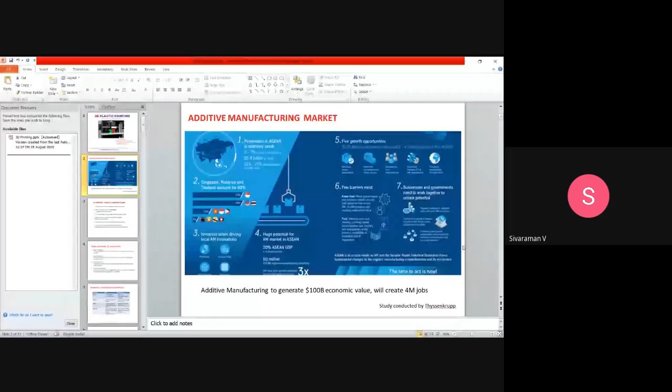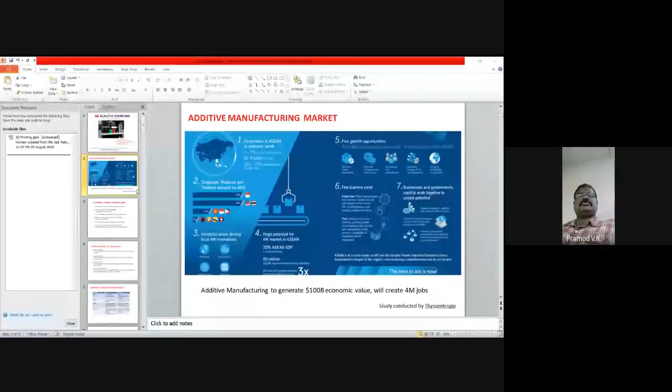Sorry for the break. It happened due to poor internet facility.

Let me once again quickly go through what I explained in the last few slides. This slide shows a report given by Thyssenkrupp Group for ASEAN countries, and it is predicted that additive manufacturing is going to generate 100 billion in economic value and will create 4 million jobs.

Additive manufacturing has the potential to create 3 to 4 million jobs by 2030 and will reduce overall imports. In this ASEAN group, India is not included. Of course, India is not included by the Thyssenkrupp Group, but the same report is valid for India also.

By 2025 to 2030, around the same growth, 50% growth will happen as seen in the ASEAN market. Additive Manufacturing Hub in India will focus on innovations around additive manufacturing solutions in metal and plastic technologies for customers in marine and offshore, automotive, cement industries, chemical, mining, and other heavy industries.

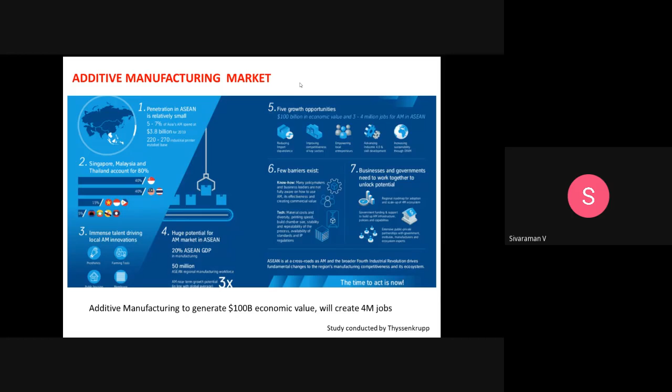As I explained earlier, I will quickly go through what is 3D printing. There is still confusion between 3D printing and additive manufacturing. If you Google it, it will say both are the same, but there is a distinct difference between 3D printing and additive manufacturing.

Basically, 3D printing is a process of building an object layer by layer. The layer thickness can be controlled digitally by means of a 3D model. Since it is fundamentally additive rather than subtractive, the other name for it is additive manufacturing. ASTM F42 defines 7 different additive manufacturing processes. I will tell you what those 7 manufacturing processes are.

This additive manufacturing is just an industrial version of 3D printing. In a nutshell, if I want to differentiate between 3D printing and additive manufacturing: 3D printing is a term for the shop and factory floor, whereas additive manufacturing is for an enterprise and supply chain.

Now I will tell you about ASTM F42. As per that standard, there are 7 different additive manufacturing processes. What are those 7 processes? One is vat photopolymerization, number 2 is material jetting, number 3 is binder jetting, number 4 is material extrusion. In material extrusion, fused deposition modeling and fused filament fabrication are 2 techniques to extrude the materials. Number 5 is powder bed fusion, 6 is sheet lamination, and 7 is directed energy deposition.

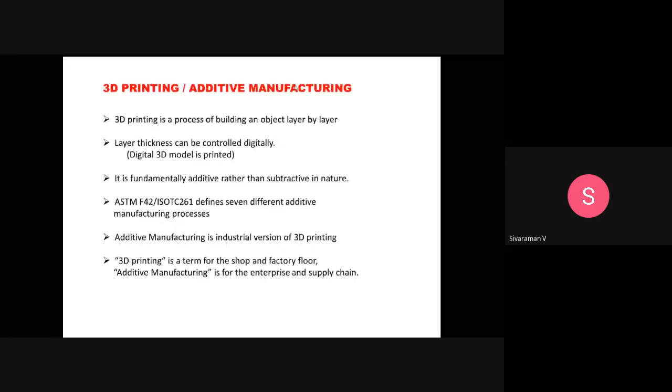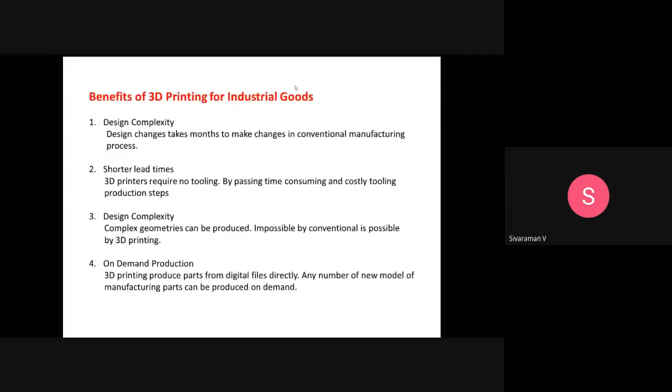If you compare 3D printing versus traditional manufacturing, 4 factors you need to consider: cost, design, speed, and quality.

For 3D printing, in terms of cost, you can save 70%, whereas it is higher for traditional manufacturing, and shipping also has to be taken into account. If you consider the design aspect, it is less expensive for 3D printing, whereas it is more expensive for traditional. If you consider the speed of manufacturing, it is more for traditional and less for 3D. There is a need to compress the design cycle.

In terms of quality, there are still problems that come out of quality, but with the latest printers available in the market, we are getting high precision products compared to the traditional one, which gets high precision manufacturing as well.

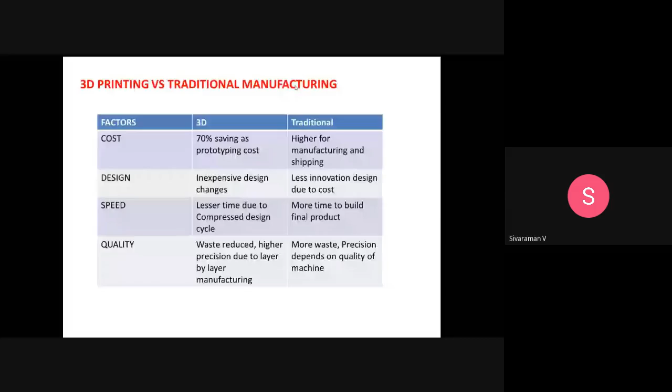Here you are seeing additive manufacturing for end-use products. In terms of percentage, they divided the common elements or functional parts, fit and assembly, patterns for prototype tooling, patterns for metal casting, visual aids, presentation models, educational research, tooling components, and others. This is the report given by Wohlers in 2014, and it is still valid with plus or minus 10% variation. This 3D printing or additive manufacturing is mostly used for functional parts, almost 30 to 40%.

As I said earlier, slowly but surely 3D printing has been transitioning from a method of producing visual aids and prototypes to a technology capable of manufacturing end-use parts. While 3D printing is still viewed by someone as being used primarily to produce models and trinkets, the reality is that additive manufacturing is now being used for functional parts in a variety of industries, as you've seen in this slide.

The widespread adoption of 3D printing is most visible in the aerospace and automotive sectors, with an 8 to 10% contribution. These were some of the first industries to adopt 3D printing for end-use parts, and they have the most accumulated experience. The ability for additive technologies to produce single lightweight pieces with complex internal geometries is particularly valuable for these industries.

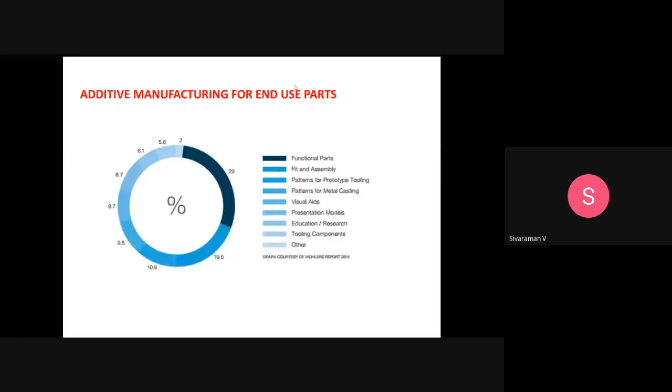This is the ASTM F42 standard, which deals with 5 main important processes. One is AM process and equipment standards, application-specific standards for aerospace, automation, automotive, and medical, and feedstock material standards covering what type of material powders and polymer filaments you can use, and finished AM part standards covering post-processing techniques, NDT, etc.

There are also general standards covering AM terminology, testing methods, and safety, including what safety precautions we need to take. Please go through these standards very carefully.

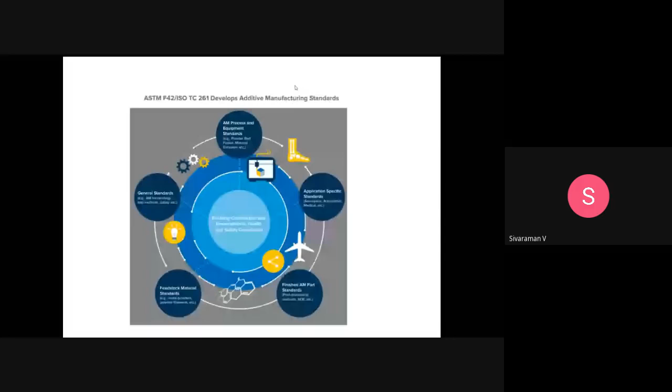For beginners, I would like to fundamentally explain what is subtractive machining and what is additive manufacturing. In subtractive manufacturing, what you see on the left hand top side is a block, which is milled by a milling machine or drilled by a drill tool. What is happening is material is removed from a block.

In the next figure, you can see chips coming out when the machining is happening. That is the reason it is called material removing process or material removing machining, otherwise called subtracted or removed, to make the component or product.

In a classic example, you can see at the bottom side an impeller manufactured through forging process. Like I said earlier, a block is forged into a model which is seen at the bottom left, and then with the help of 5-axis machining, the impeller shape is formed.

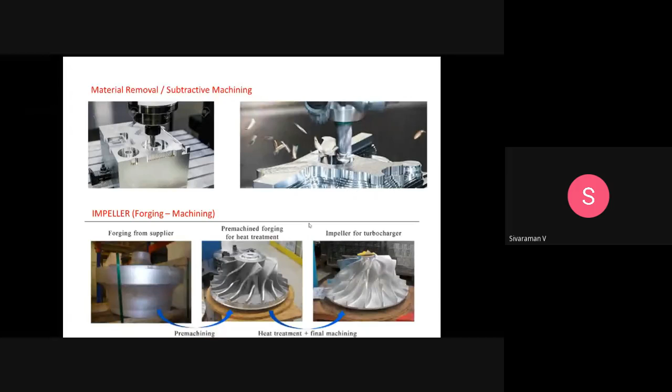I'll show you in the next coming slides. In a nutshell, in subtractive manufacturing, a block is there, and if you want to remove material, you have to remove it. That is why it is called subtractive manufacturing.

On the other hand, what you are seeing on the left side is additive manufacturing. The material is added layer by layer. This one part is called one layer. In this particular block, 9 layers are formed to make the desired component.

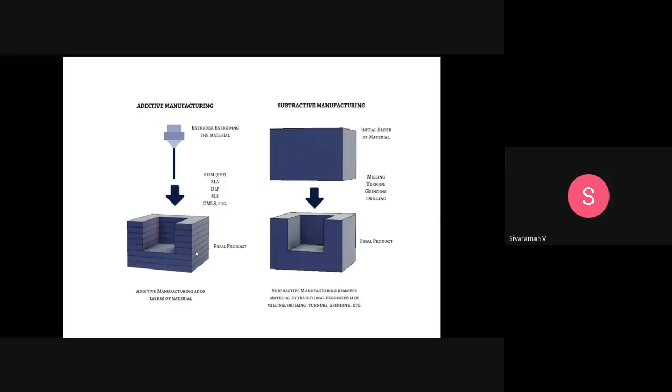With the help of 3D printing or additive manufacturing, you can even make a sphere. As I said earlier, complex geometry is possible - a typical 3D printed hollow ball in white color is shown here. It is a very, very difficult process with conventional machining, whereas without wasting material, it is possible in 3D printing.

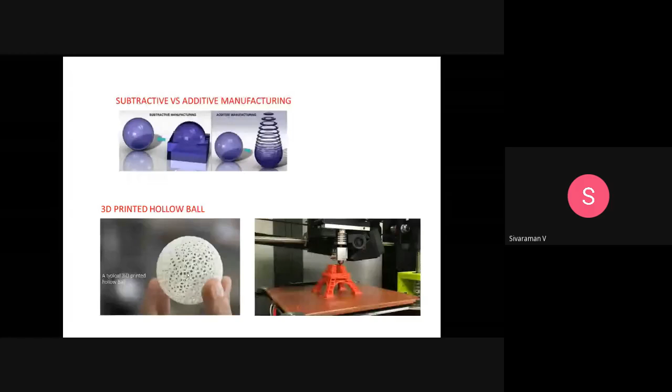On the right hand side, you can see a tower printed by a plastic 3D printer. If you go for conventional methods, it's highly impossible, and even if it is possible, it will take much more time. This is one of the classic examples.

If you want to design a bottle for your own company, forget about these 3 big players - say you are going to manufacture a product for a company that requires a PET bottle. It's an abstract idea which comes to your mind.

If you want to make this bottle visible as a product, you need to spend a minimum of 1 lakh rupees - 40,000 to 50,000 rupees for preparing the die, and the remaining amount for trial and error with the help of injection molding. So to see a product on your hand, a plastic bottle, you need to spend a minimum of 1 lakh rupees.

If you have a 3D printer, you can print the same bottle within 1 hour at a nominal price of 2,000 to 5,000 rupees for a 1 liter or 2 liter bottle. That is the biggest advantage. And once you produce the bottle, you can make any number of design changes on it.

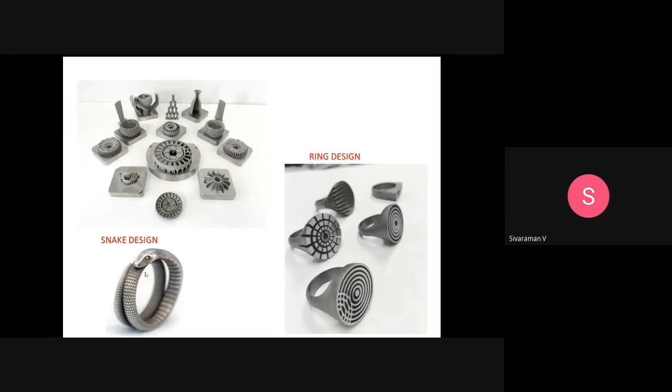One classic example is the snake design, which is absolutely not possible with conventional methods, and it is only possible with technically sound people. It will take a lot of time and cost.

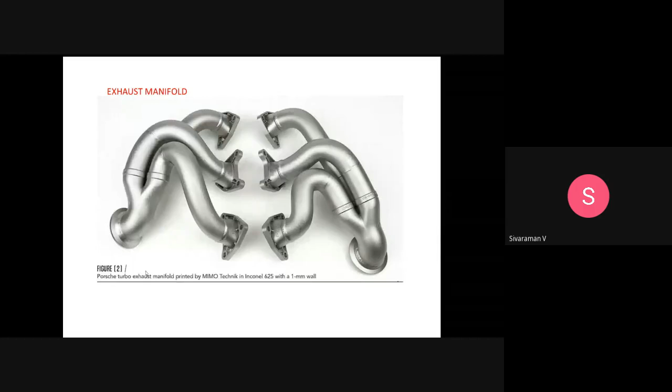And this is another example, but this is not plastic. I am just showing this to the participants so you can see similar kinds of complicated objects can be made with the help of a 3D plastic printer also. This is an Inconel 625 exhaust manifold for a Porsche automobile.

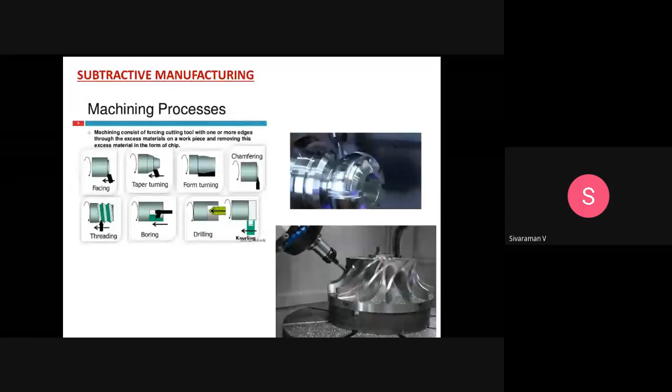If you go for 3D printing, you can simply skip all these processes. You don't need any of these processes for 3D printing. You can print layer by layer the exact shape of the component shown at the right hand top corner. And complex geometries, like the impeller I mentioned earlier, can be done with 3D printing, whereas with conventional machining it can only be done using 5-axis machining.

So, in a nutshell, at this point you should now know what 3D printing is. As I said earlier, it quickly converts an abstract idea into a physical product. So what do you mean by that abstract idea? Any idea which comes to your mind. Say, for example, I quoted earlier this.

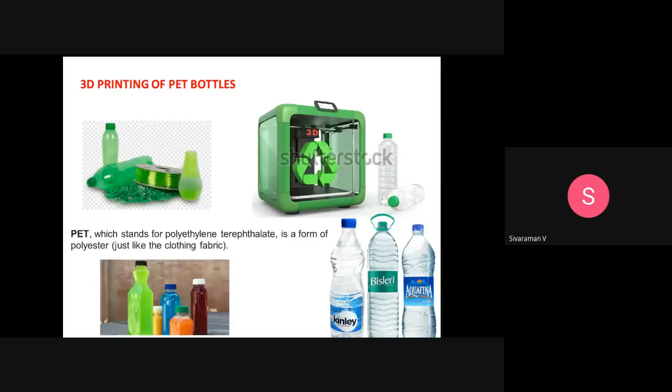If you have an idea to make a PET bottle, which comes to your mind, what do you have to do next? First, that abstract idea in your mind, you have to make into a 3D model with the help of 3D software. From the 3D model, you give a command to the 3D printer to print the abstract idea which came to your mind, the same PET bottle. How this is going to happen, I will tell you in the coming slides.

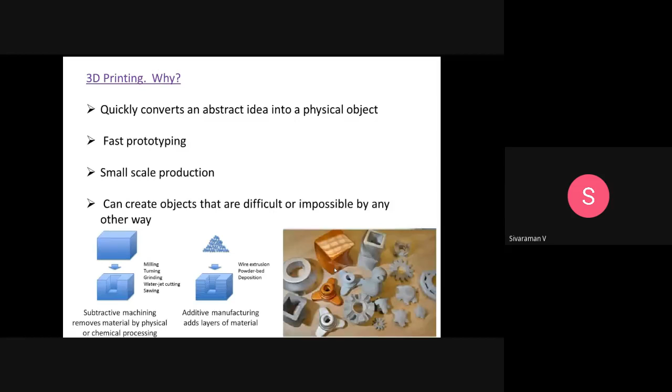3D printing quickly converts an abstract idea into a physical object, and it's fast prototyping. If you want to see the prototype of the idea that forms in your mind, you can take the help of a 3D printer. As of now, it's for small scale production, and it can create objects that are difficult, or we can say impossible, by any other conventional way. We can produce them with the help of a 3D printer.

Some examples: we can create any gear systems or any assembly which is required for manufacturing, automobile, or aerospace components.

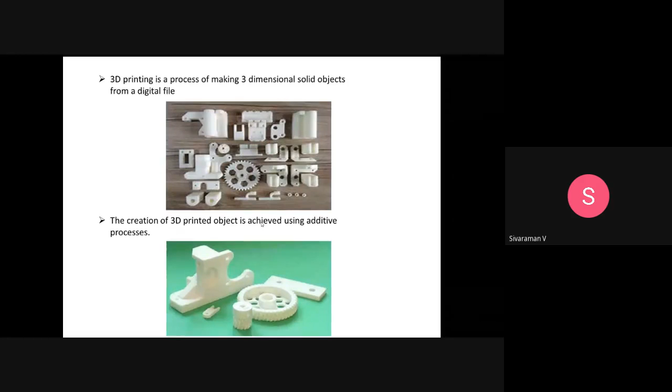So this I discussed earlier, the difference between additive and subtractive. Basically, subtractive removes material, additive just adds layer by layer. I don't require much time to spend on this.

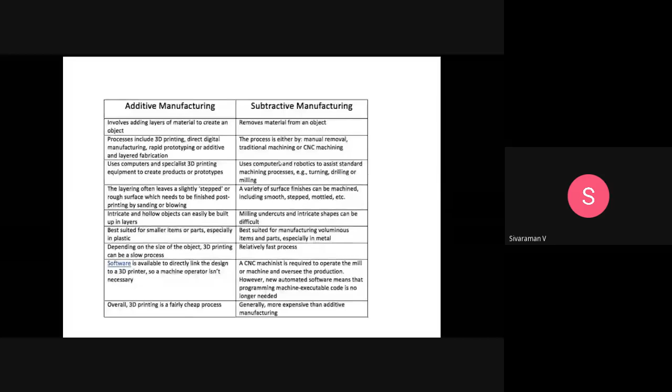Once you design the model, you have to convert it into a .stl file. It's a stereolithographic CAD software 3D system, the .stl file. Once you convert it into a .stl file, you have to use slicing software. What this slicing software will do, I will tell you in the coming slides. It will just break the model into a number of pieces, just like slicing your bread.

Your bread, you can slice it into any number of parts. Like that, you have to slice your abstract idea or your product formed in a 3D software. You have to slice it. Why do you have to slice? I will tell you in the coming slide. Once you use this slicing software, it breaks the model of the surface into slices.

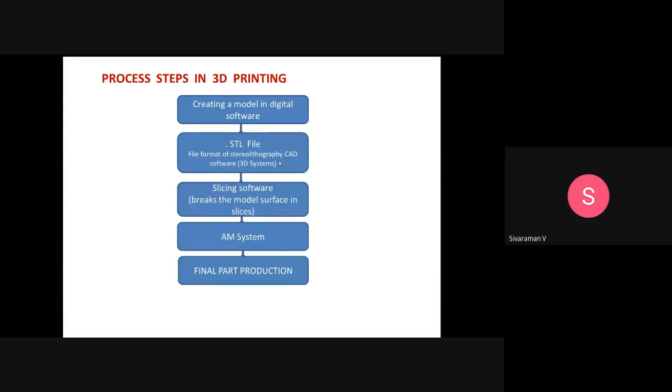There are two filaments commonly used in industry as well as academic purposes: one is PLA and another is ABS. In PLA, the biggest advantage of this polylactic acid filament is that it is non-toxic and bioplastic.

It is good for environmental properties. It gives a good smell when heating is happening, and high print speed and resolution is possible. The biggest disadvantage is it cools down slowly and has low heat resistance. Compared to ABS, this can easily break, and it requires thicker walls than ABS.

That is the reason why most commercial people go for ABS plastic. Still, academic people and students are preferred or requested to use PLA because it is biodegradable and will not harm your body. The extrusion temperature required is 170 to 220 degrees centigrade, and you have to follow a bed temperature of 20 to 55 degrees centigrade. I will show you in the coming slide what is bed temperature and what is extrusion temperature, and why it is important.

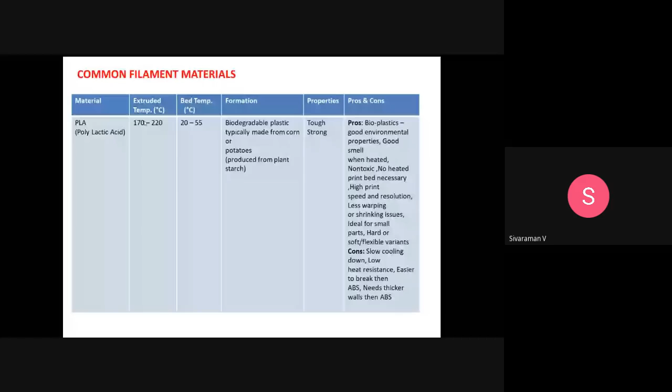On the other hand, if you look at ABS, acrylonitrile butadiene styrene, if you are using this material as a wire, you have to maintain a temperature of 215 to 250 degrees. Then only the extrusion process will happen at this temperature. Whereas in PLA, 170 to 220, the solid wire can extrude easily. Whereas in ABS, 215 to 250 degrees centigrade is required.

One basic problem with ABS is it is petroleum based and non-biodegradable. Once heating happens, fumes will come, and the product will deteriorate over a period of years or months because of sunlight. But on the other hand, compared to PLA, the biggest advantage is it gives a smooth finish.

So if you want to show a product to a customer or a student, you have to show the product with good finish, then only people will like it. So in that aspect, ABS is preferred, and it solidifies quickly compared to PLA, and it is durable and difficult to break also. That is the reason it is preferred for all kinds of mechanical parts.

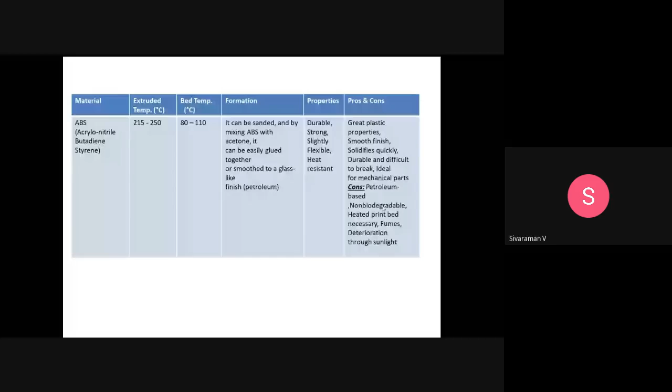So if you want to build a 3D printer, what do you have to know? You have to know what components are present, how it is going to function, what are the hardware parts, how the printing is happening, and what are the functions of every element present in this 3D printer. In the coming slides, I am going to discuss in detail about this plastic 3D printer.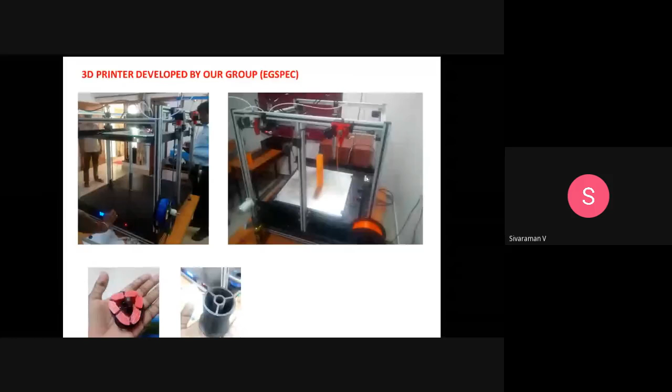This is called the bed, what you are seeing. If you carefully look at the product, you can see this bed is inclined. This particular printer can make 3D prints of 500 by 500 by 500, that is length 500mm, breadth 500mm, height 500mm.

This printer, we assembled at a cost of 1 lakh rupees some 1.5 years back. Now the cost has slowly reduced. You can make the same printer at a cost of 80,000 rupees.

If you watch this printer during our training session in our lab, we left this printer during printing and came after 4 hours. We found that the bed is inclined, which is a serious problem encountered. Since we assembled it on our own, we know how to rectify this problem.

Otherwise, if you buy this printer from a company, you have to wait for the company people or engineer to come. It will take hardly 2 or 3 days, and they will rectify the problem. Since we assembled it, we rectified the problems ourselves and printed the material again and again. I will tell you after a few slides why this print bed is inclined.

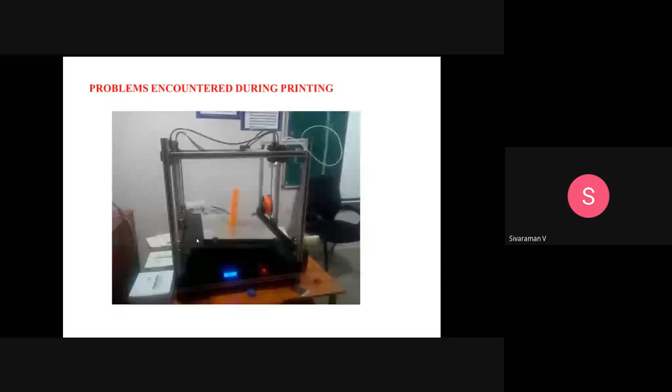This is the print head, the anatomy of this 3D printer. I am showing you here by focusing on the print head. In this print head, you can see a nozzle. Through this nozzle only, the filament, either PLA or ABS, will be fused, and the material will be built layer by layer, like this, which comes out as a product.

One important thing is the cooling fan. As you all know, this nozzle will be heated according to the filament melting range. For example, if it is ABS, the filament will melt around 210 to 220 degrees. If it is PLA, it comes around 170 to 180 degrees. So your nozzle must also be capable of withstanding the temperature.

So you have to select the nozzle. Nozzles from 0.5 to 2.5 diameter are available in the market. You can see here a fan called the cooling fan, and this blows air over the extruded plastic to cure the print. So this fan helps to cure the print and also helps retain the shape.

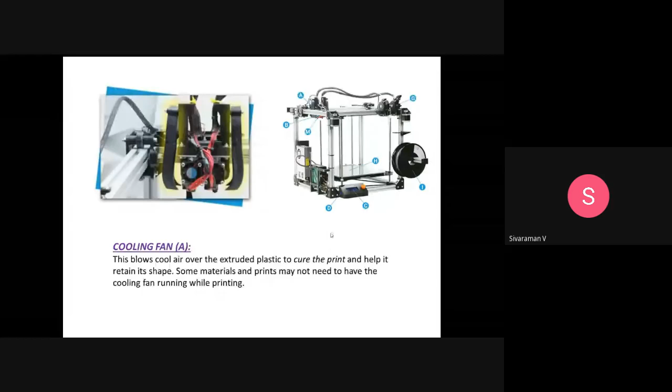Some materials may not need this cooling fan, so for that material, there's no need to install this. The second one is the heat sink fan, which is also just beside this fan. It blows air across the heat sink to prevent heat from creeping up the extruder barrel.

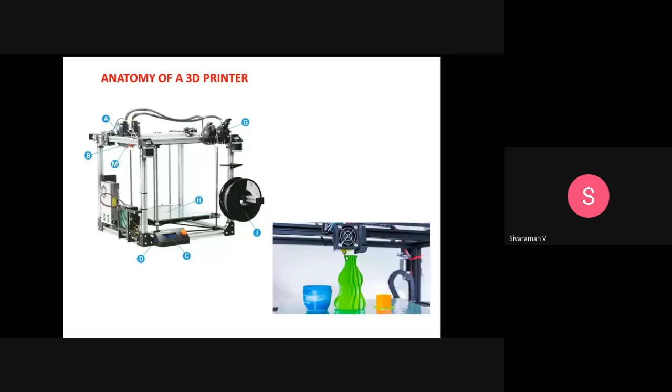So what happens sometimes is when the material is fused, some creeping will happen because of the change of temperature. So this heat sink fan helps prevent the creeping up at the extruder barrel. Heat creep can cause some filaments to swell and jam in the extruder barrel, and because of this, if creeping happens, your entire product will get collapsed.

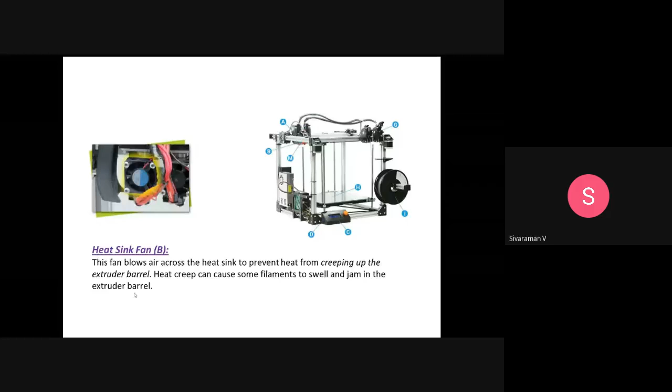So this is the user interface, you can see in any product. This is an LCD display. In this, you will get information about the print related data, what is the printer temperature, how much percentage printing is going to end, and several other data you can get from this. Adjacent to this user interface, you can see an SD card.

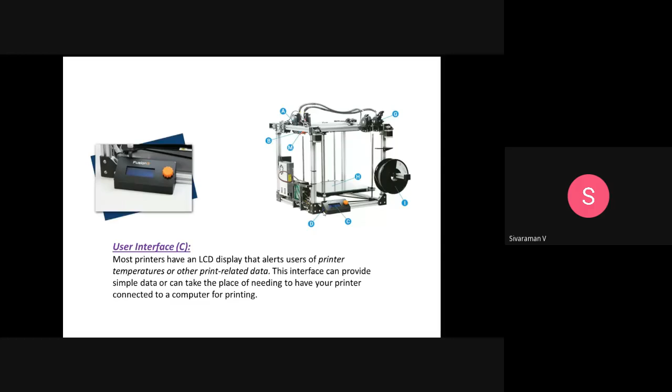This is nothing but an SD card, and I will tell you why. Whatever object you draw on the 3D modeling software, as I said earlier, once you draw the required product or the modeling is done in a 3D software, you have to convert it into a .stl file. Once that conversion happens, you have to send it to the slicing software. In this slicing software, G-codes will get generated by taking into account the boundary of the product. So all those G-codes will be copied into this card, the SD card.

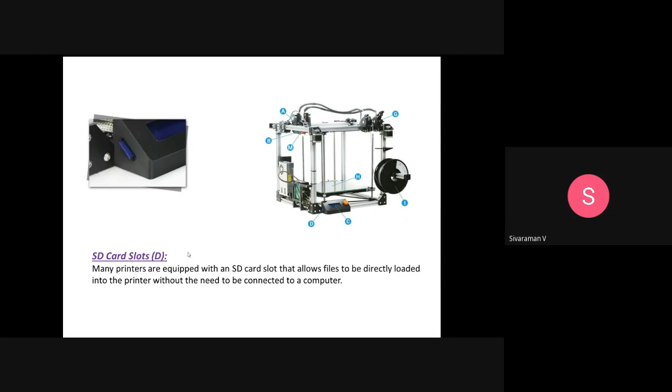The bigger advantage of this 3D printer is you don't need to connect it with the modeling software, computer, or laptop. You can do your design separately, send the data through the internet, or do the printing in a different room from the modeling. Just copy the file to an SD card, insert it here, and the print happens automatically. That is the biggest flexibility and advantage.

This is the belt or cable, driven by motors, which provides movement in the XY axis. Watch carefully here - for XY movement only, this belt is used. Then the question comes: what happens for the Z axis?

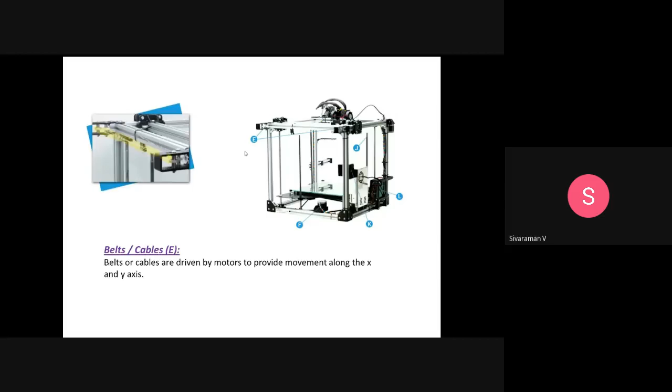So for X and Y axis, belt or cable is used. For Z axis, lead screw is used, right?

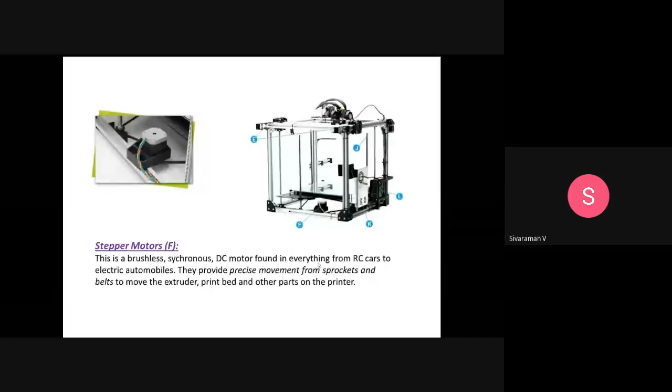The stepper motor is very famous for all - found in everything from RC cars to electric automobiles. It gives precise movement through the sprocket and belt to move the extruder and print bed on the printer. The print bed has to move accurately and precisely, as seen in the modeling software, and this stepper motor is very helpful for that.

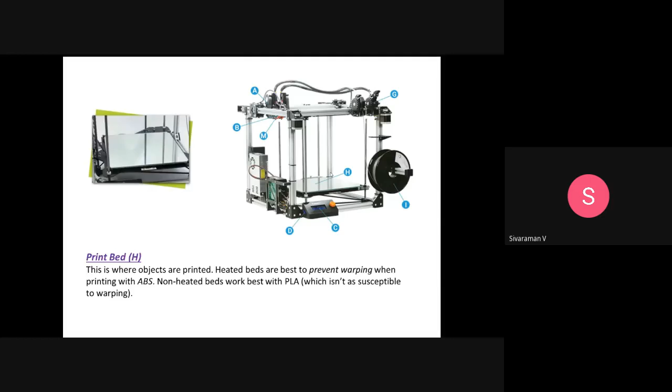This is the filament, as discussed earlier. PLA and ABS are the two filaments we can use, available even on Amazon, costing around 1,000 to 1,500 rupees, available in multicolor. This filament comes in 1.75 to 2.85 diameter, and according to the filament diameter, you have to ready the nozzle size accordingly.

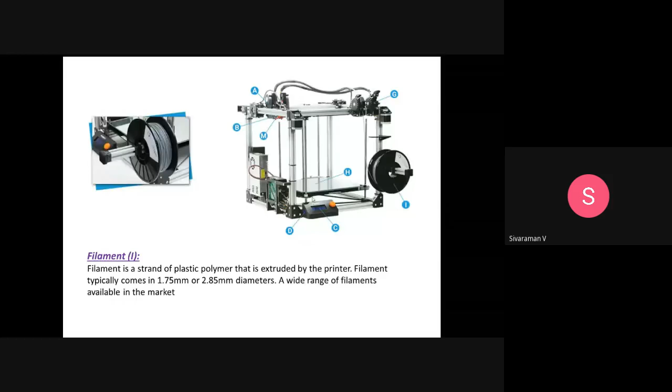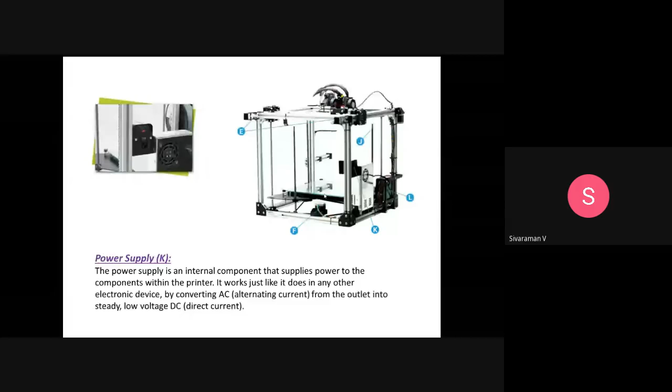This is the lead screw I explained before, and this is the power supply - we all know it's a must to convert AC to DC. This is the motherboard, the heart of the 3D printer, containing the microprocessor and other circuitry. What type of motherboard are we using? I'll cover that in the coming slides.

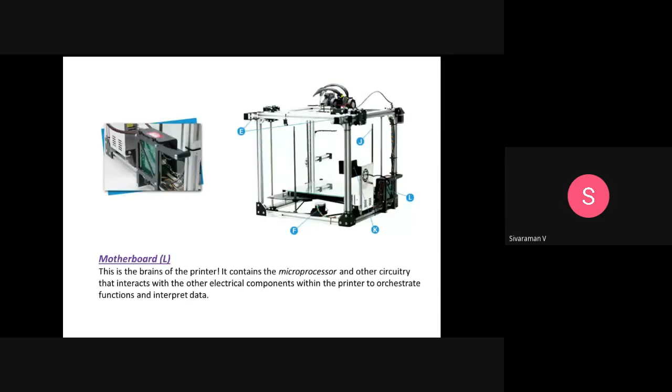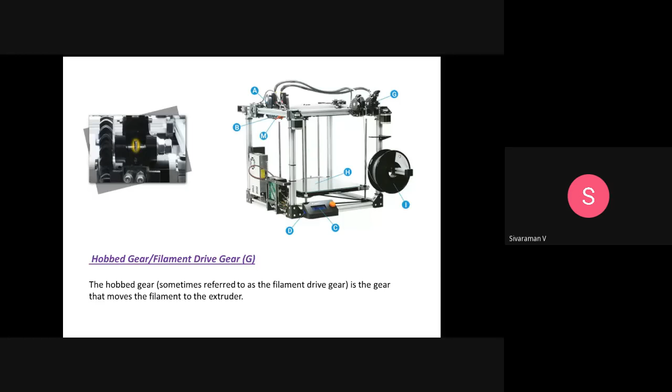Once the filament comes down, it travels with the help of this filament drive gear, fed through the filament wheel. This filament drive gear feeds the filament to the nozzle, so this component is very important.

This filament drive gear feeds the filament through this, and the PTFE tube prevents heat from traveling up - because once heat is generated at the nozzle, if it travels beyond this part, the filament will melt prematurely right here. If the material melts here itself, you will not get proper extrusion at the nozzle end.

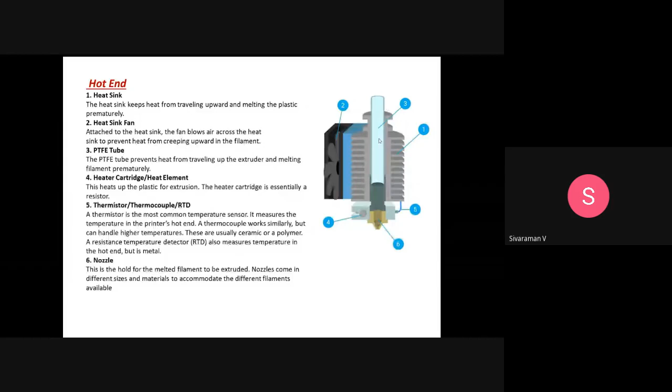So all material will jam here, so no printing will happen. This PTFE helps prevent material from traveling up the extruder. It prevents the heat from traveling up this path, and it also helps prevent the filament from melting prematurely. This is an important thing you need to know.

You have to listen carefully at this point. Every sliced part you take will have an X component, Y component, and Z component. Those X, Y, and Z components will be taken into account by the slicing software and made into a G code. So basically, the slicing software will convert your .stl file into a G code.

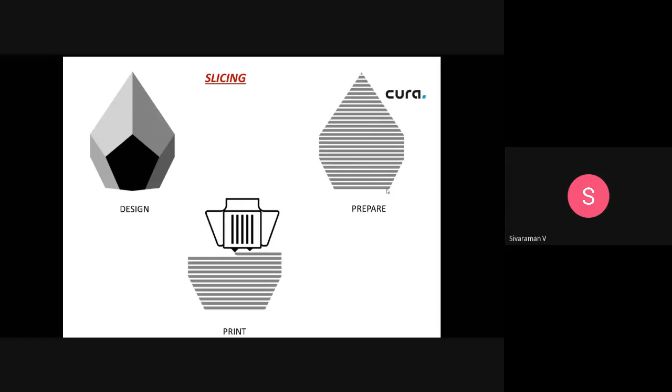After that, the G code is given to the additive manufacturing machine. This is how the printing happens layer by layer.

Figure 3 shows - in the last slide I mentioned how Cura is a slicing software. So how does Cura work? Cura will first slice the model layer by layer and generate a G code. Once finished, the G code can be sent to the printer for manufacturing the physical object.

This slicing software - in fact all slicing software - will create a path for a 3D printer to follow. These paths are instructions for geometry, and they tell a 3D printer what speed to print at and what layer thickness to adopt. This is very important. Even some advanced slicing software also take into account the GD&T, geometrical dimensioning and tolerance, part of the component.

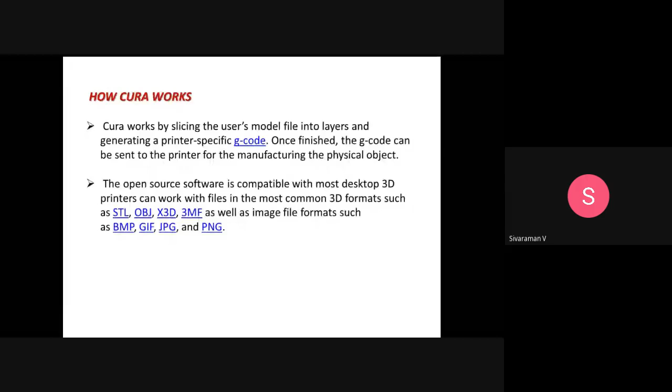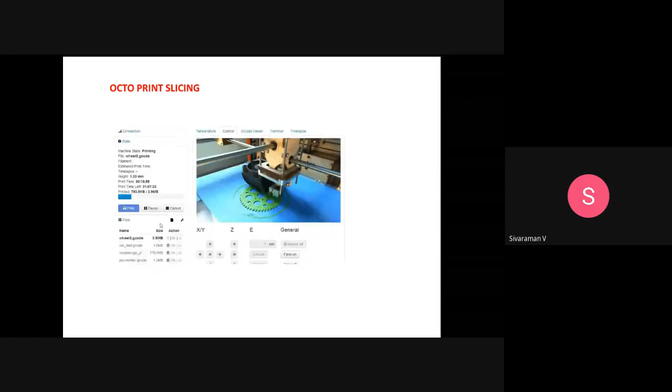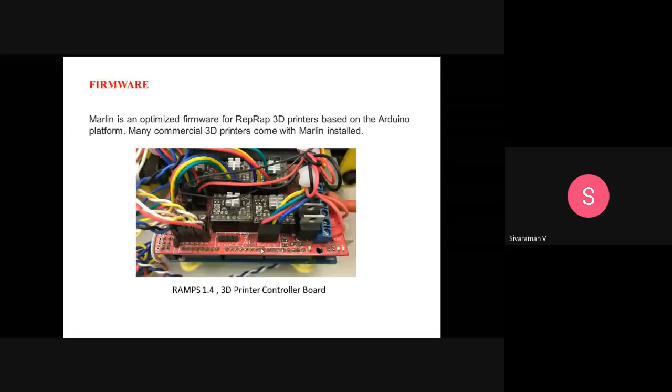Some recent technologies have come out with open resin platforms to print the teeth and the base separately. Previously both the teeth and base were built together. Now both are printed separately, and then they are fused together to join.

There are a lot of applications. Special purpose machines are also now available for dentistry applications. In traditional methods, denture production is extremely costly and involves long wait times for fabrication and shipping. Because of that, denture 3D printers have come out, and this uses an open certified resin system.

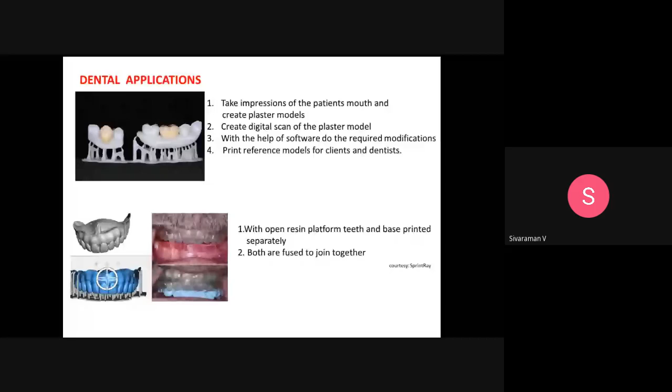3D printing has revolutionized how jewelry is made. Uniqueness, precision, and attention to detail are the key aspects of quality jewelry, and this is exactly where 3D printing shines.

Don't think that you can directly print your gold or diamond or any rare component like a ring directly - it is not possible. 3D printing jewelry doesn't mean directly producing the pieces of jewelry.

What jewelers often do is 3D print highly detailed wax models of the desired rings, which are later used to make molds. So we have to model the desired ring on a 3D platform and then export the model as a file.

Once the model is created, the mold material is poured. Once the mold hardens, with the help of an oven, we melt the mold or burn out the rings and connected structures. This is slightly a tedious process, but many major jewelry companies are now using 3D printers to create multiple designs to satisfy their customers.

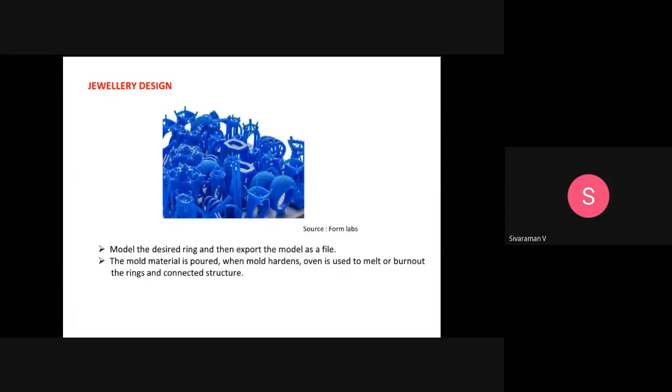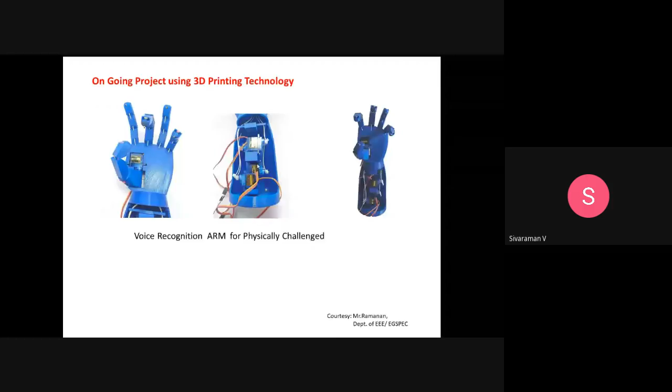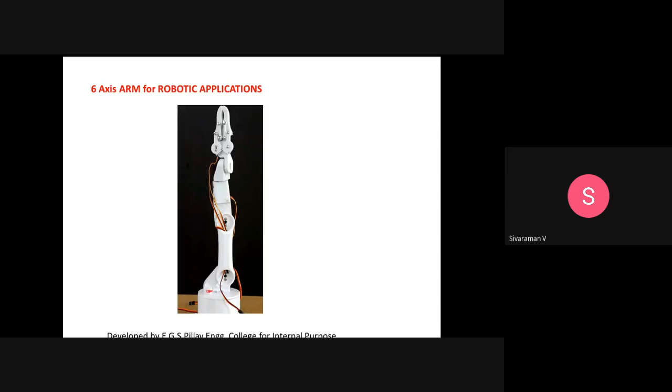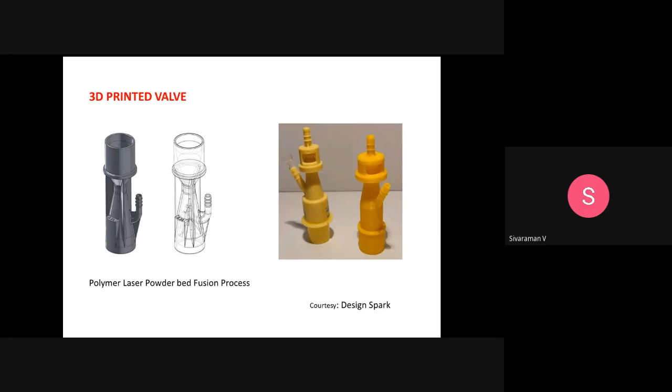The wall thickness can be varied based on the nozzle size. A 0.4 to 1.2 mm nozzle is preferred to build this wall thickness, and the layer height of 0.4 or 0.8 mm can be used.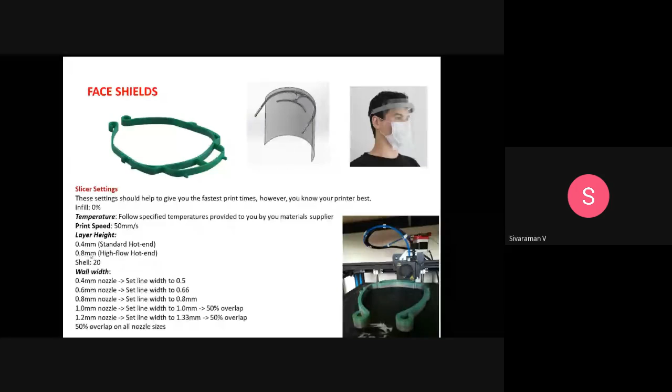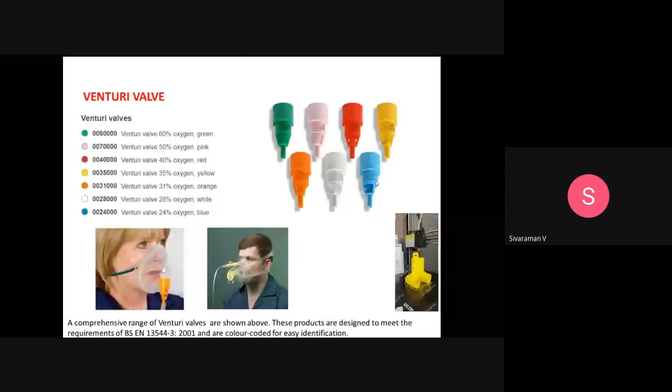This is another classic example, a face mask or respirator style, which can also be prepared with the help of a 3D printer. This credit goes to Copper 3D. Studies have shown that copper destroys the replication and propagation abilities of SARS, MERS, and even other respiratory viruses. Taking this into account, Copper 3D, a company, developed a respirator style where copper and copper alloys can eliminate pathogenic organisms such as bacterial strains, coronavirus, influenza virus, and fungi after a short period of exposure.

This Copper 3D respirator style face mask uses a nano copper additive that works as an antimicrobial agent. It is reusable, washable, and recyclable. This novel filtration system designed by Copper 3D includes multiple layers with different geometries to provide effective fine particle filtration.

You can see here some filtration particles between this plastic component, and these are all to provide an effective fine particle filtration. It includes a copper nanocomposite that has been lab proven to deactivate viruses.

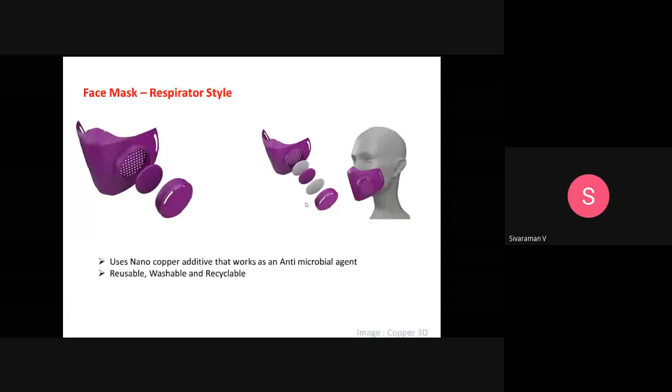With this, I end my presentation. Any questions, I welcome to answer. I thank all the participants for listening, and I thank the organizer. My special thanks goes to Dr. Biju, who is heading the mechanical engineering department, also a professor, for inviting me to present some of the fundamentals for the participants here. I thank him once again. If there are any questions, I'm ready to answer.

Can you hear? Hello? Hello? Hello. Hello? Yes, sir. Hello?

Sir, myself Dr. Harmony, working as a professor in the Department of Mechanical Engineering from KSRIET Tiruchengode. I need your phone number and email ID, sir. Yes, sir, I will give it to the coordinators, I think they will email you. Okay, please send it for the purpose of the AICTE Atal program, sir.

For the purpose of the AICTE Atal program, sir, 3D printing and design. Okay, sir, do you need my contact number or email, sir? Yes, sir, contact number and also the email ID. Okay, how can I share? Can I share now? Okay, sir, no problem. 98434... 73434, sir. 98434 73434. Yes, sir, 9843473434. And my contact email is iitmvs@gmail.com, IITM vs@gmail.com, Gmail. And my contact is also available with the coordinator, Dr. Biju. If you find any difficulty, you can also help me, sir. Okay, sir, later on to contact. No problem. Thank you, sir.